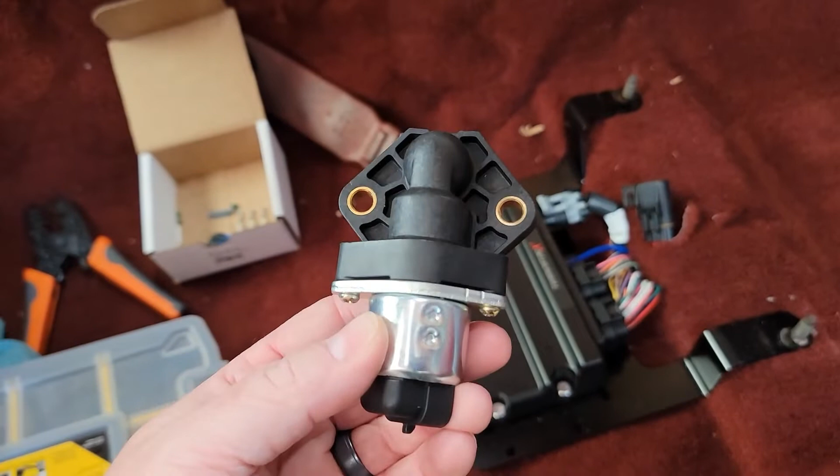Okay, so first thing is you can get this Ford bolt pattern, and the hole pattern is for a Ford IAC, but it's got the GM stepper motor on it. See that? This is like 25 bucks on Amazon. You can Google it and find the part number.

Next thing is Holley sells this. It's the 570-211 4-cavity female black connector. So you can see in the box, it comes with the connector that plugs into the idle air control, the terminals, the little seals for the wire, and a little clip that holds it in.

Okay. Now you'll need a set of crimp tools like this one or something similar. So as you can see, it's got the 24 to 22 gauge wire crimp, 20 to 18, and 16 to 14. And then it's got the seal crimps. So there's two different size seals. The seals are these, the little green things that I showed you. So that basically makes that a weather tight connector. So that's that parts wise.

You'll need wire. So at the company I used to work for, I sourced a cable right here. This is just a regular 4-conductor 20 gauge cable. This stuff is extremely cheap. So if you don't have a 4-conductor cable, Holley sells a 4-pin. It's basically 4 wires with the pins that plug into that JB1A or JB1 or J1B, whatever it is, connector that you'll have to plug into. Which leads me to my other thing you'll need.

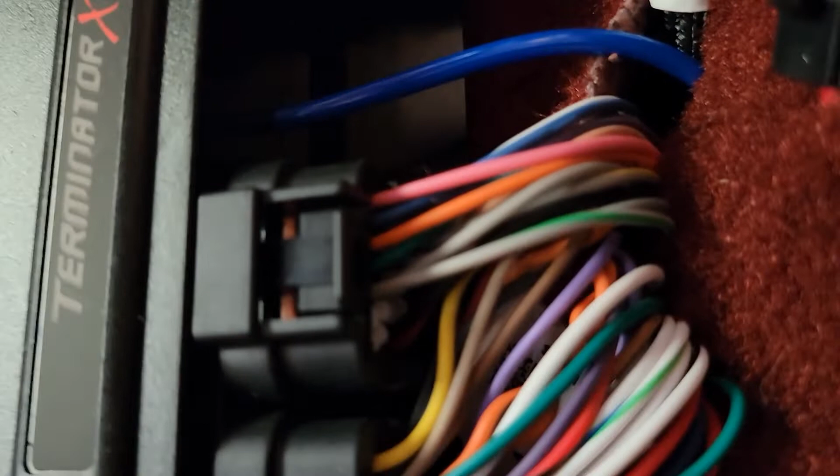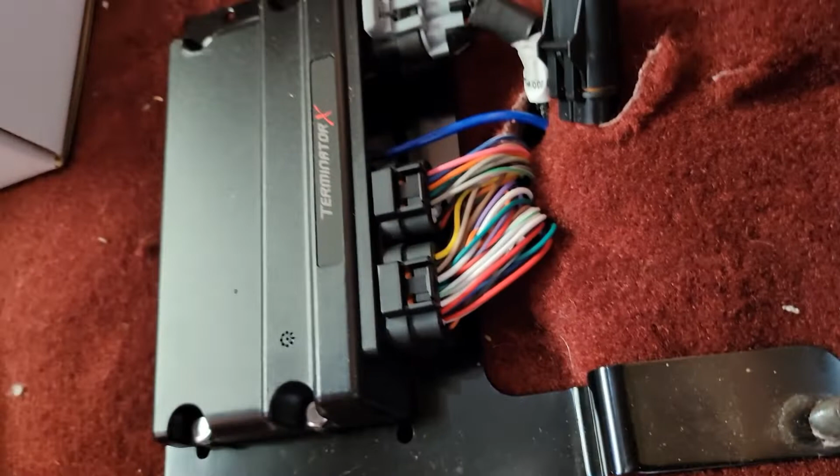Here we go. So you'll need these. These are the AMP Super Seal 1mm terminals or pins. So these will snap into the connector right here. So you can see those white plugs. So I'll basically unplug this connector, pop those little plugs out, and then once I get the wires crimped on the cable, I'll push those wires in, and I'll feed everything up through the firewall where the harness is, with the rest of the harness.

I have some black wire sleeve like Holley uses, so it'll all match. When I get done, it'll look like it's from Holley, like it's the factory wiring harness. So anyhow, I'm going to stop this video right here, and then I'm going to get to work, and I'll get back to you guys here in a minute.

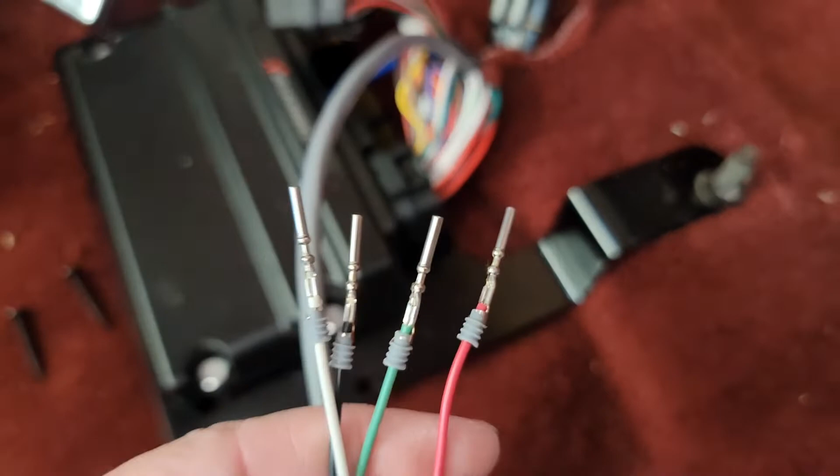All right. So I got the cable ran, I got the pins crimped on. Alright, so I really hope this is worth it. We'll flip you around and show you.

These AMP style connectors are not the easiest things to work with. And when you're just adding 4 pins, I've probably done this the hard way. I pulled the connector completely apart. And I probably should have just popped that little clip up and popped them in and been done. But I didn't. So here we are. Let me, geez.

I made a mess. I mean, I could fix it, but learn from my mistakes. Flip it around and show you. Now, see all these pins right here, right? Now, luckily everything is still held in place. It's in the right number location, but they got to go through those holes.

So at first I tried to run the little piece right here that holds everything together all the way up on the pins and then just slide it back on, and well, that's not working. So I'm gonna have to put each wire in individually and then slide it back together. So that being said, future reference, if anybody does this, do not take the connector apart. You simply pop that little white clip up, pop the pins in and push it down, and you're done.

So I've literally wasted about 30 minutes doing it this way. So please, please, please learn from my mistake. Do it the right way the first time and don't go through the crap I'm going through right now. All right. I'll get back to you guys in a bit.

All right. So I got it, and that sucked. I ain't gonna lie to you. That was terrible. If I had this on a bench with a whole wiring harness laid out and like a little vise, piece of cake. But with that much room coming out, not a piece of cake. So, like I said, learn from my mistakes.

So what you want to do is, basically when you're adding these wires, you'll pop those little white things that are in there out, okay? Pop those out. Or, I mean, I guess at the worst case, if you have to pop this end off, that's fine. But do not pull everything out.

So you pop this little clip right here up. You push up on the white part right there, just easy. Pop it up. Push your new wires in. Push it down. You're done. If you do it the way I done it, expect to be here for a good 20-30 minutes getting all those pins back in there. So anyhow, I'm going to plug this back up. So there's that.

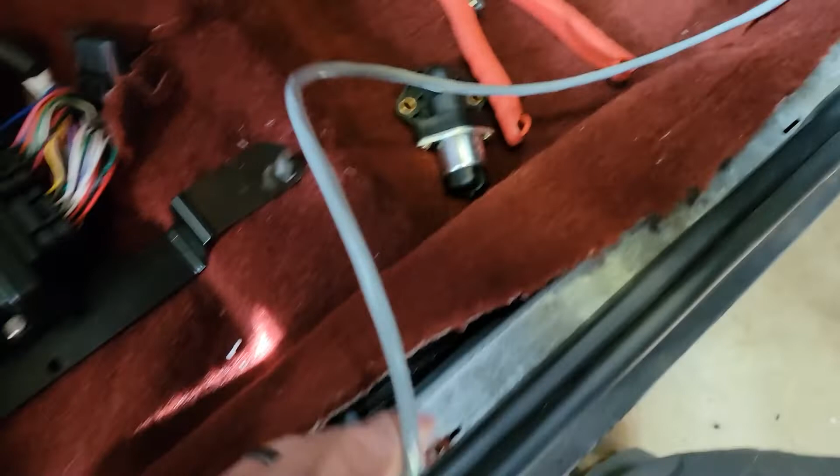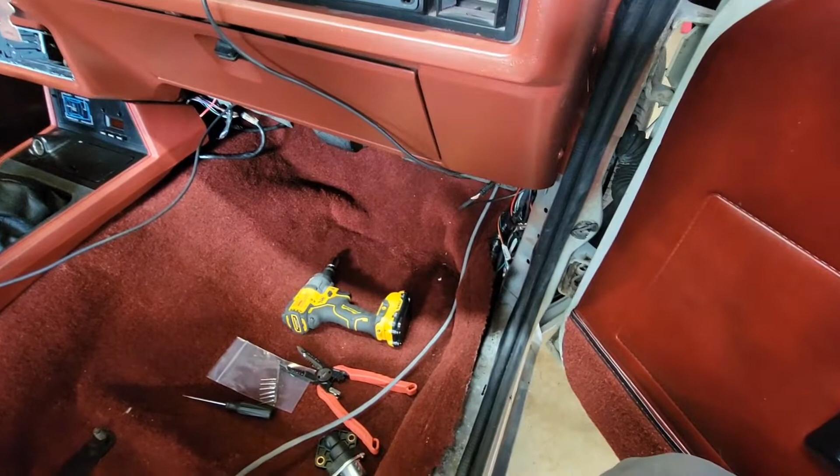So now I want to get all this wire right here cable tied up with everything else, go up there, put my black wire sleeve on it, feed the wire sleeve through the firewall so everything matches, get my length how I want it, mount the IAC, get the cable length where I need it, cut it, peel it back, strip it, put the new terminals on it, plug it in. Then you got to hook the laptop up to it.

I'm going to have to go into the settings and basically take the Ford idle air control out of the outputs, so it frees that output up. Then I'll change it in the idle settings. I can show you all that. I'll change the idle settings, and I'll put in the GM LS IAC style idle air control.

What I'm going to do, I'm going to open up one of the global files, and I'm going to take the park positions and all that from one of those for the GM style idle air control, start with those factory settings, and then I'll tune from there. Just because I don't know anything about the GM idle air controls, how the park positions work.

With the factory Ford stuff, I can look on my actual Tuner Pro software or my binary editor, and I can look at the factory Ford tune for the idle air control and get the park positions and, you know, just all that stuff on there. With the GM stuff, I can't do that because I don't have any daggum GM tuning software other than the Holley. So that's what I'm going to do.

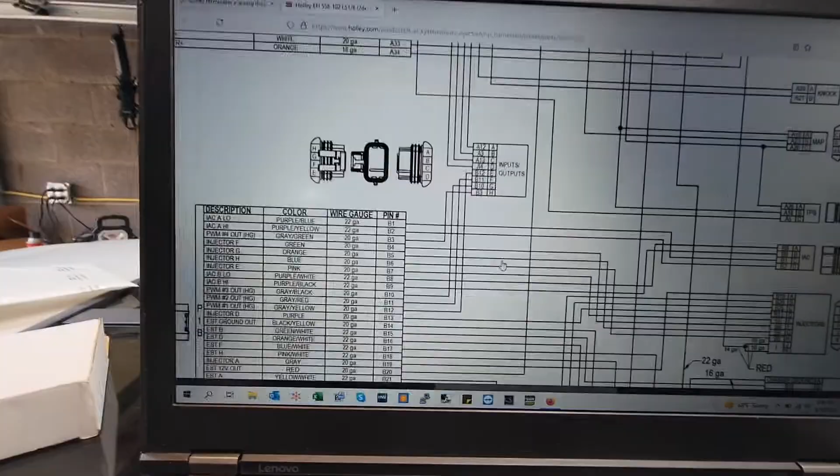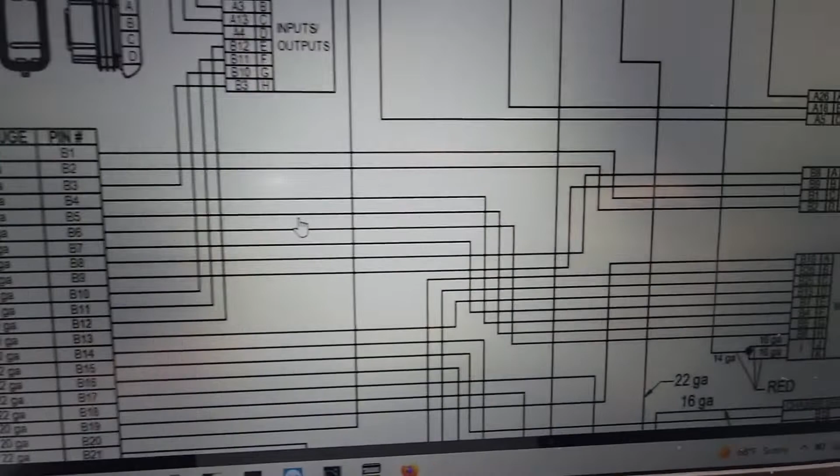Alright guys, so you can see right here, pins 1 and 2 is the IAC low, IAC high, and pins 8 and 9 are B low and B high. Now when you trace those over, they come over to the IAC motor. So you got 8 and 9 is on A and B, 1 and 2 is on C and D.

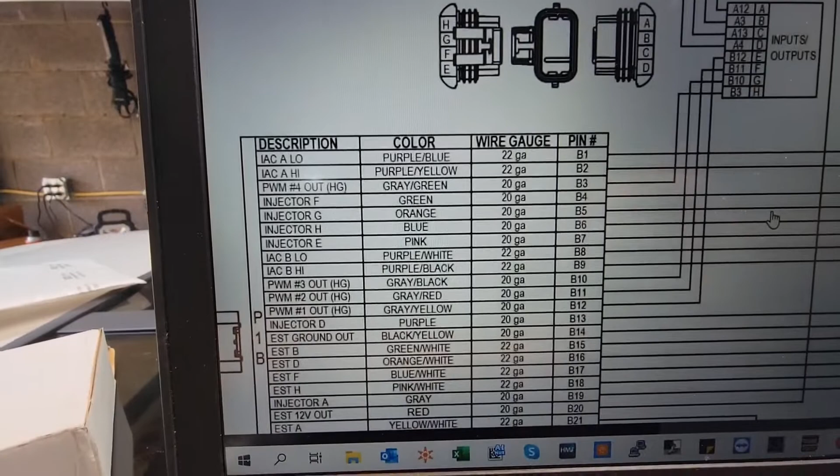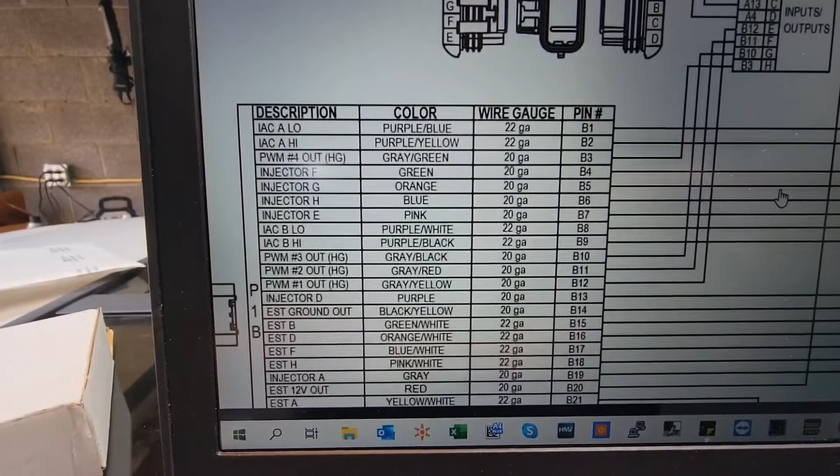Now, the factory colors are purple with a blue stripe, purple with a yellow stripe, gray with a green, or I'm sorry, purple with a white stripe, and purple with a black stripe. I think GM uses those same colors as well for the factory idle air control wiring. So what I done was the cable that I had, it had red, black, white, green, and brown. Of course, I always cut the brown out.

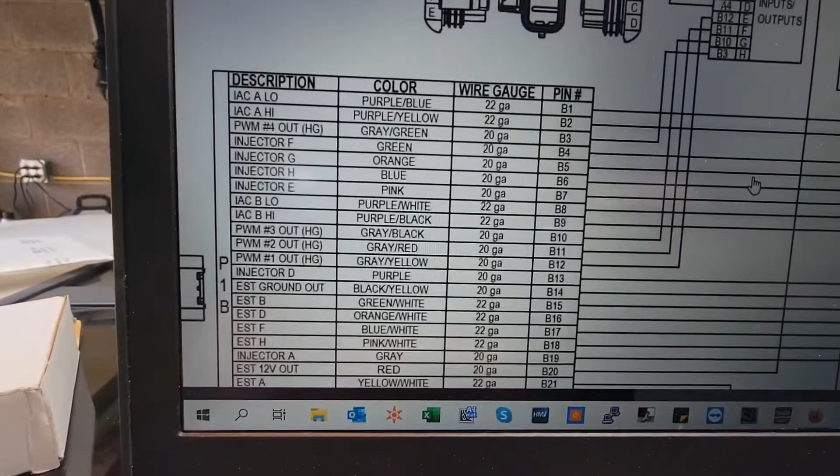And so what I have always done in my line of work is that red and black were always my I plus, I minus. White and green, or we used to use blue and yellow, was always V plus, V minus. If you don't know that, I plus, I minus is current, plus and minus. V plus, V minus is voltage plus and minus. So I just carry that same mindset over to this cable. So I put red and black on 1 and 2, white and green on 8 and 9. It makes it simple for me.

Just remember, when you do this, you do not have to have those exact wire colors. As long as you know which wire is on pin 1 and 2 and which one's on 8 and 9, you basically transfer that from the ECU to the idle air control, and that's all you need. Now, would it be cool to have those? Sure. I almost paid $33 and bought the Holley harness that they make. It's not really a harness, it's just 4 individual wires with the pins already on them. But it's like 33 bucks for 4 wires that are, I think, 10 feet long maybe. That's a lot of money for 4 wires with 4 pins on them.

When, I mean, you could literally buy those pins for like 50, 60 cents a piece. Now you got to pay shipping. So you could buy 10 pins for, I think shipping and all was about $11. It's pretty cheap compared to 33. And then you can go down to your local AutoZone or wherever, Amazon. You can buy the wire on Amazon for probably less than 10 bucks.

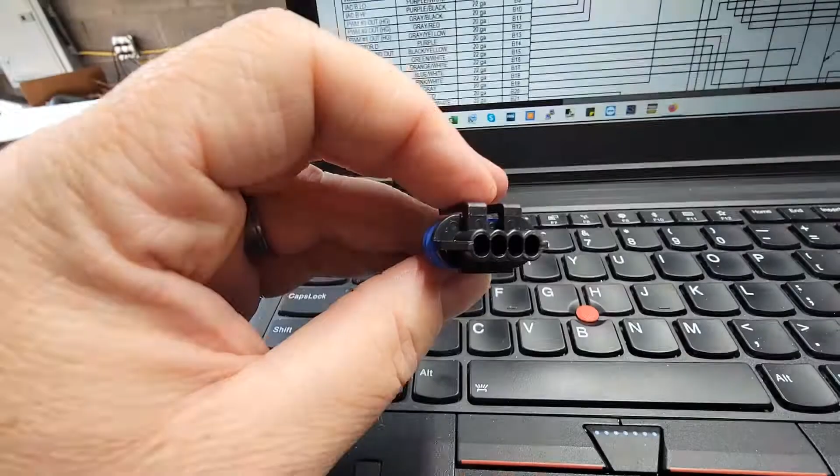looking on the connector, trying to find if it shows where pins A and B are, and it does. So if you look, there's an A, there's a D, there's a B, and a C. So you transfer that to here, there's A, B, C, D. So 8 and 9, which is my white and green, is going to go in A and B, and red and black is going to go in my C and D.

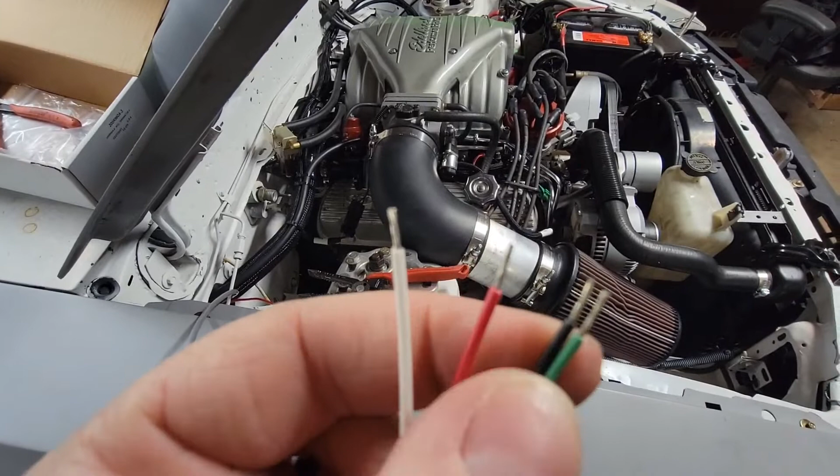Simple enough. All right, so I'm going to get out here, get my wire prepped, get the sleeve on it, the shrink tubing on. I've already got the wire cut and stripped, and you typically only have to strip back about 3/16 of an inch. You can go with like 1/8 of an inch with these pins, because the part that's actually being crimped is maybe 1/8 inch at the most.

So I'm going to take my wire sleeve, slide over this, slide a piece of shrink tubing over it, slide the seals over it, then crimp my pins on, heat the shrink tubing down, and put everything together and plug it in and get stuff changed inside the software. So when I get all that done, I'll get back.

Alright guys, here's something else. I bought this kit right here from Harbor Freight. It's a shrink tubing kit. I've already used a lot of it, and this is some pretty good stuff. So anyhow, that's what I'm doing here.

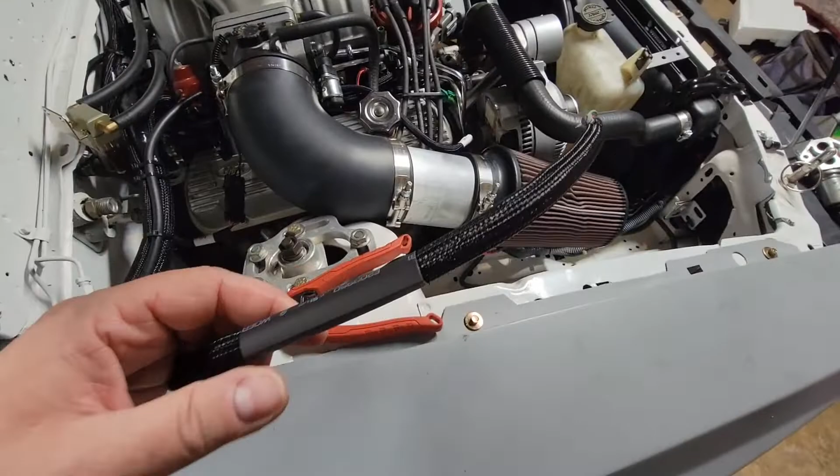So got my sleeve over, got my shrink tubing over. Now it's not that short, I have it scrunched up. It'll actually go all the way out to here when I'm said and done. So I'm going to get everything up here, get this connector on it, and get it plugged in. And I'll walk you through the software, how to change all that stuff, and then go from there. See you in a minute.

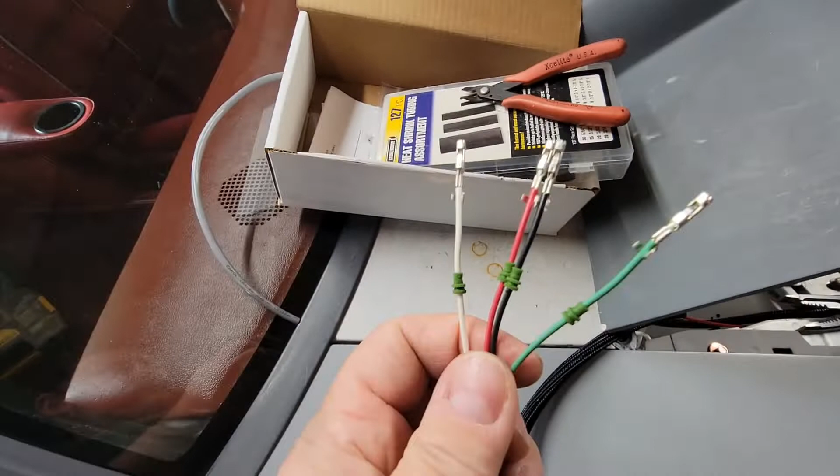Alright guys, so here's the pins crimped on before I put the seals on. So I'll show you how this goes. So you can see that's a nice crimp right there, and that's because of those.

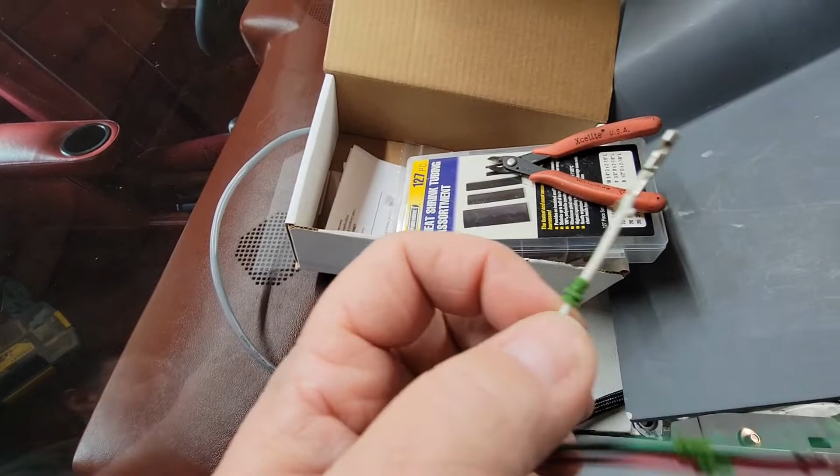So now what I'll do is, if I can do this one hand, I don't have a tripod out here. Well, I got a small tripod. Anyhow, it's just rambling.

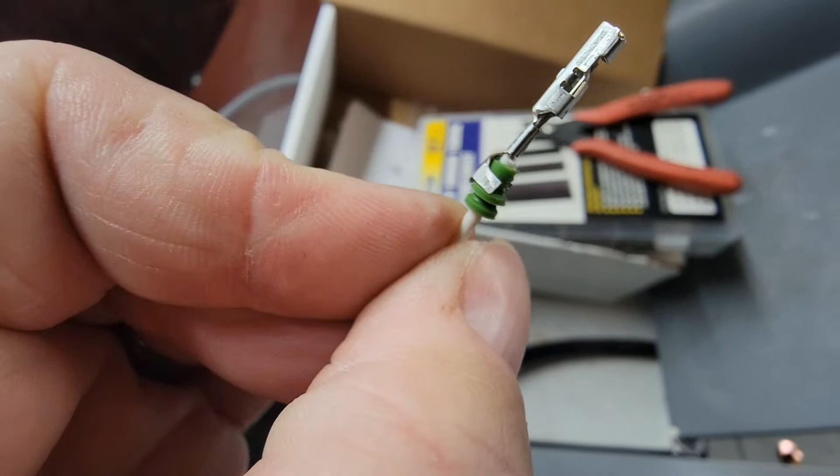So see that? So I can get a good shot of that. So basically, you'll run that wire seal up to there, and then you'll use the round part just to smash those little legs around. It'll just crimp them in a circle, and it's just enough force to keep that from sliding out whenever you push everything together, and it just holds it in place.

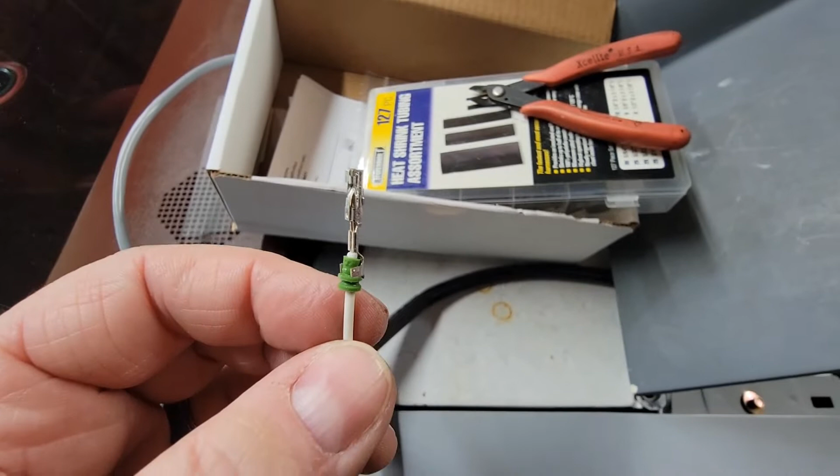And of course that fits snug around the wire, and that keeps moisture and water from getting in there. Probably most everybody that does this knows, but for those that don't, that's why it's called a seal. So anyhow, I'm gonna get these seals crimped on, and then get this connector put together. Alright, so you can see that's the end result.

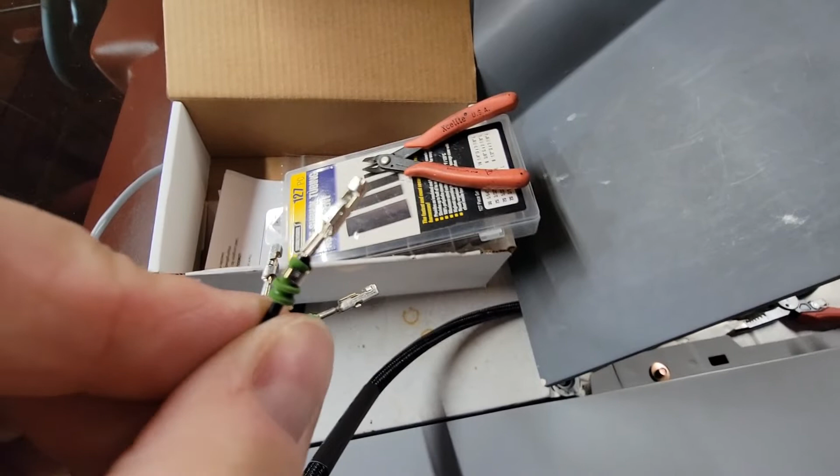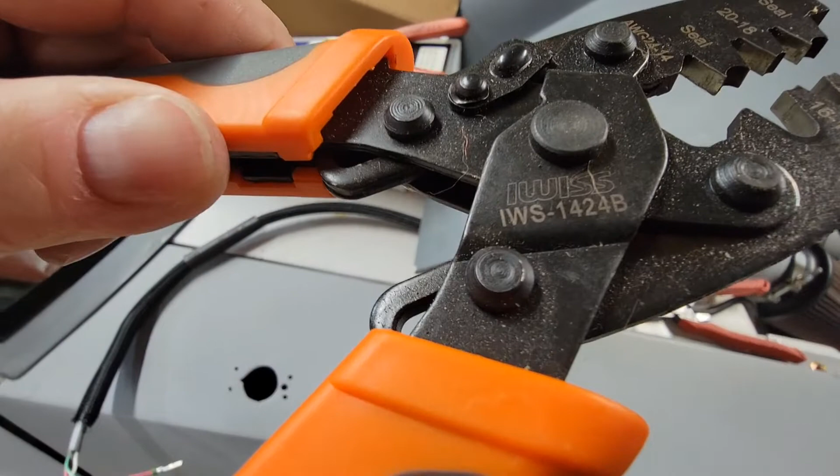Man, my camera really not wanting to focus on these little wires. See that? That's all it is. It just holds it on. I'll give you a shot of these pliers so you can look them up on Amazon. They were like 15 bucks or something. The IWS-1424B. They make better ones than these out there. Just Google or go on Amazon and look up WeatherPack wire crimpers.

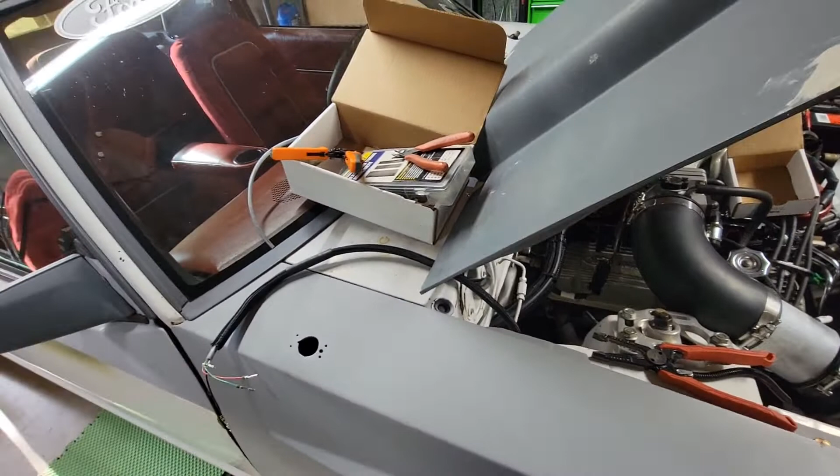So all these connectors are GM style Delphi connectors and AMP connectors that Holley uses, but it's the same type of connector as the WeatherPack stuff. I have a little WeatherPack kit that I bought off Amazon that's really good if you're just hooking up like an MSD box or something that doesn't draw. You can get them where they can handle some pretty decent current, but the kit that I bought, I think, is like maybe 10 to 12 amp. I'd have to look.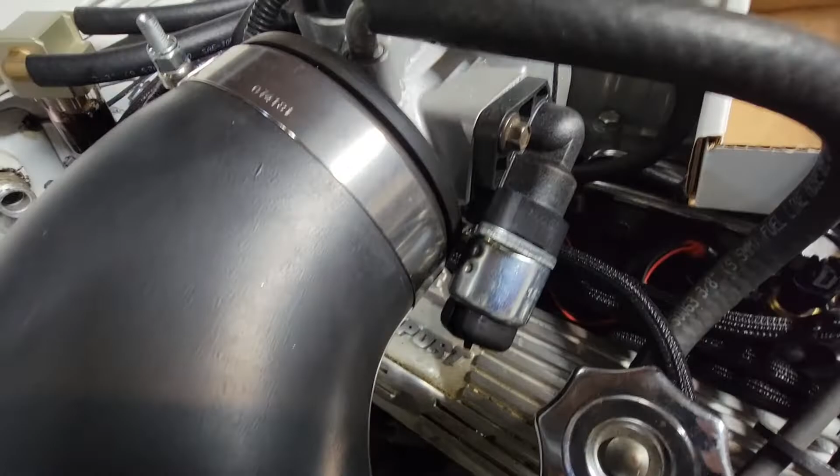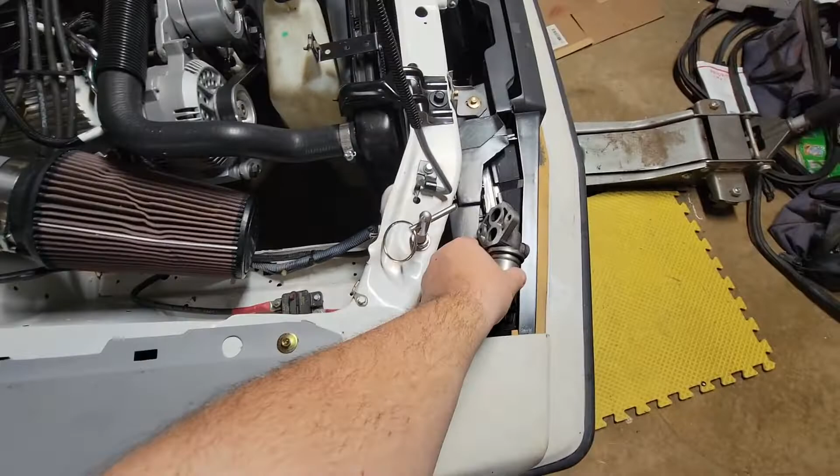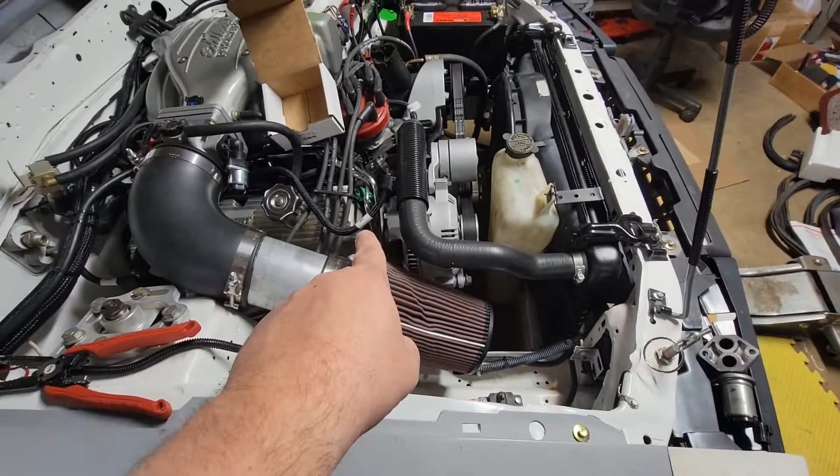But anyhow, there's the new IAC mounted. Here's the old one. So this is a Ford Explorer. You see the connector's different. So I had to take the connector off of this, and put the Ford Explorer style connector on it. This is the old setup that takes up an output.

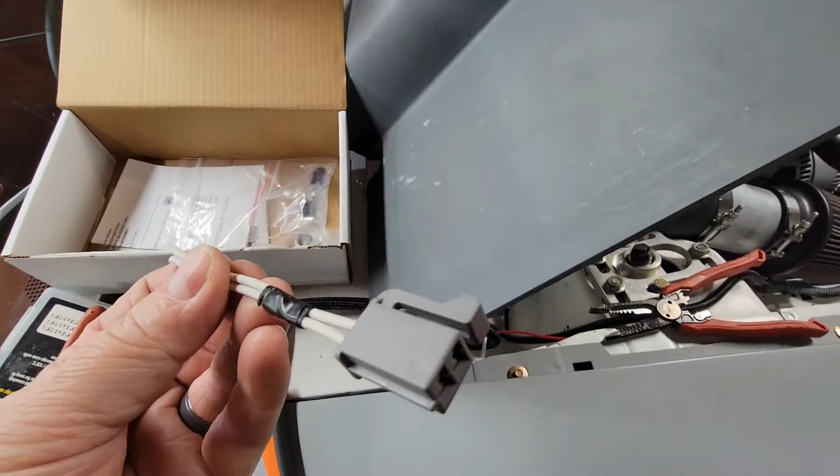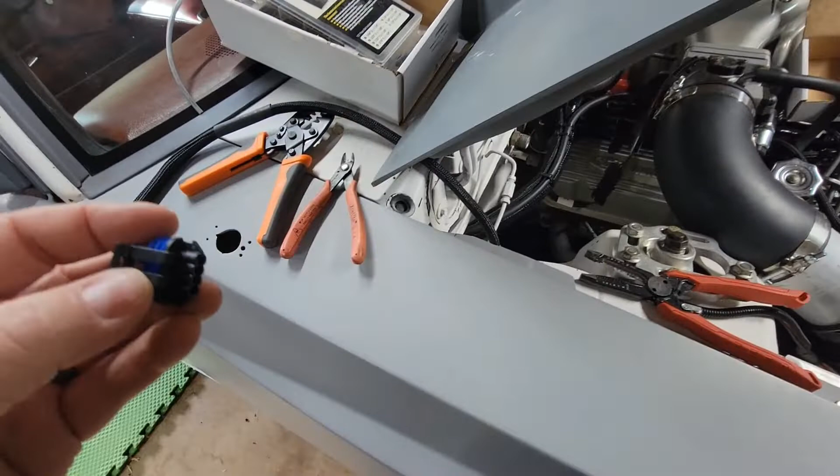But if you look over here, I kept this. So if this GM stuff don't work out, then I can try to find a Ford Mustang idle air control, I think the F-150s too will work, and see if that's any better. So I kept this in case I ever needed it. So anyhow, I'm gonna get this connector put together, get all my sleeving ran up and my shrink tubing shrunk up, and get everything plugged in. I'll get back with you guys in a minute.

All right, guys, so there's the final product. These things go together pretty easy, pretty self-explanatory whenever you put them together.

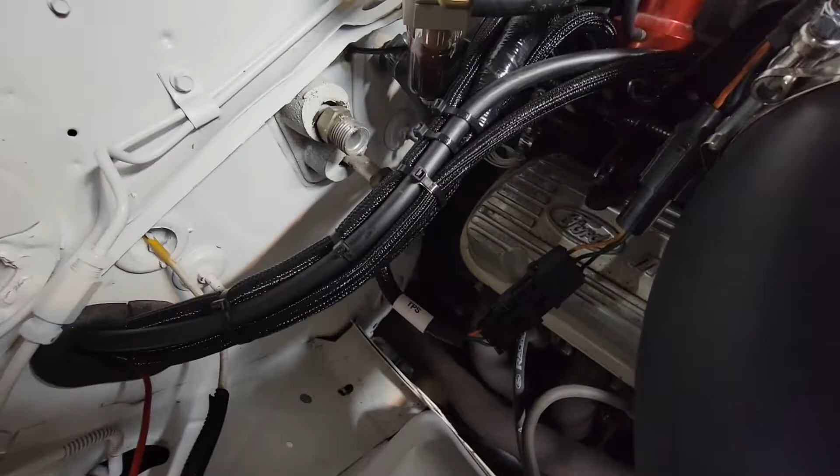So anyhow, finished product there. I'm going to route this with that, a couple cable ties on it to hold it, plug it in, then I open up the software. Alright, cable tied up. It looks exactly the same as it did before I started, except I put a little cable tie right here to keep that from getting tangled up in my throttle down there and hanging it up or something.

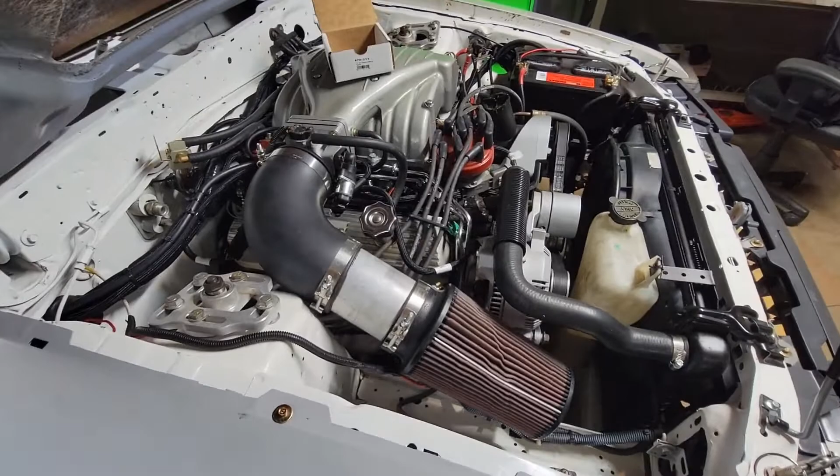So everything should be good. If this works out, then I'll be taking this wire and probably just folding it up underneath there in case I ever need it for anything. But all right, let's open up the software. Let's see here, I'll just minimize that. Well, actually, before I do this, okay, I'll show you. We'll open global.

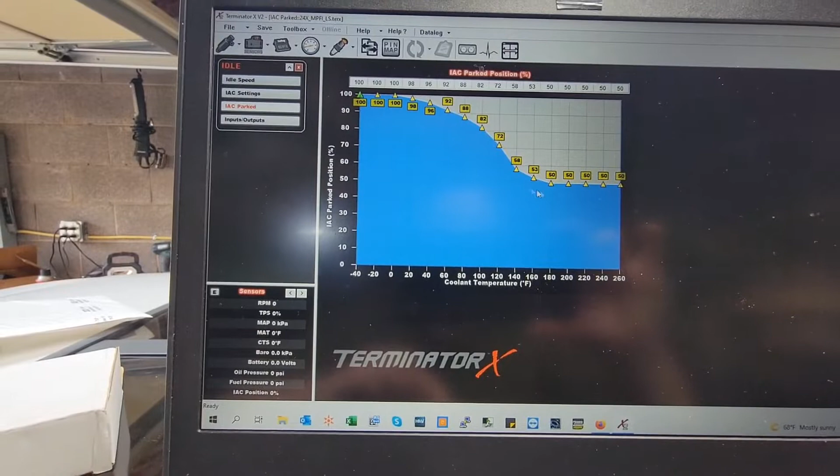Yeah. Go to GM LS based. I don't know what these 58 and 24 are. Oh, that's some LS crap. I have no idea what that is. Maybe it's the teeth on the, I don't know. Well, let's just do that one. Idle settings, parked. Now, so this is really similar to what the Ford is.

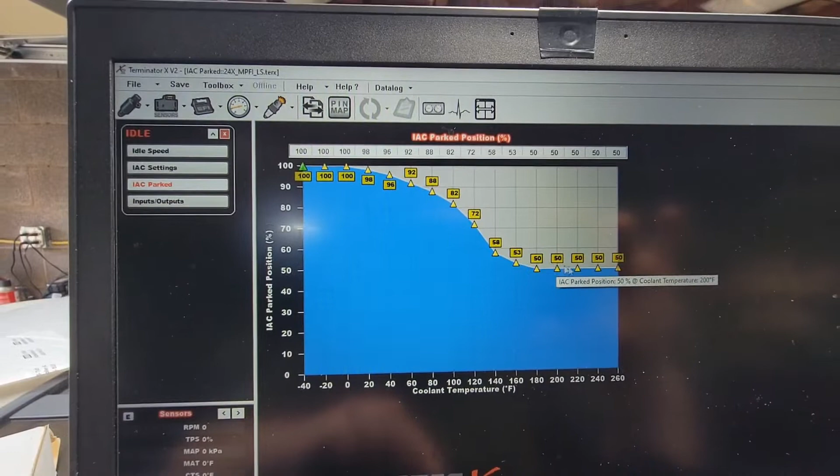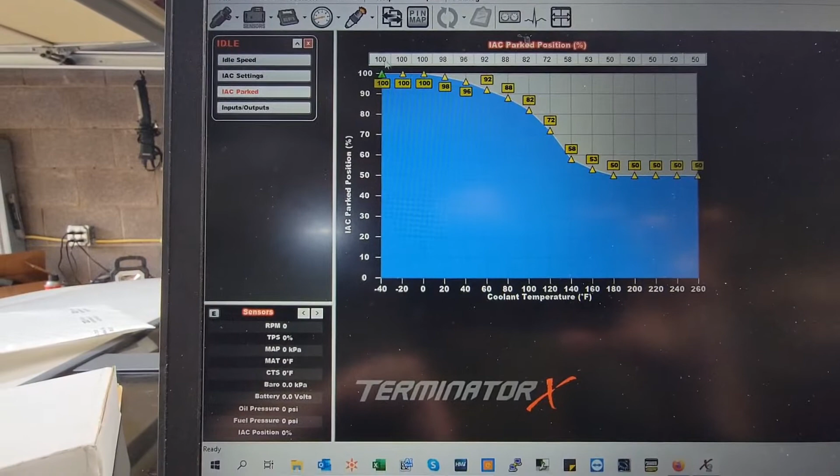It's not much different. So I may leave what I have and just adjust the bottom numbers right here. Basically, you never really want to run your idle air control at 100% because you will shorten the life of it. So I normally change these numbers to about 95 or 98. Looks like I got 100, so you could change that to 98 right there, and then it would never completely max out, which I don't think you'll ever need it to fully max out.

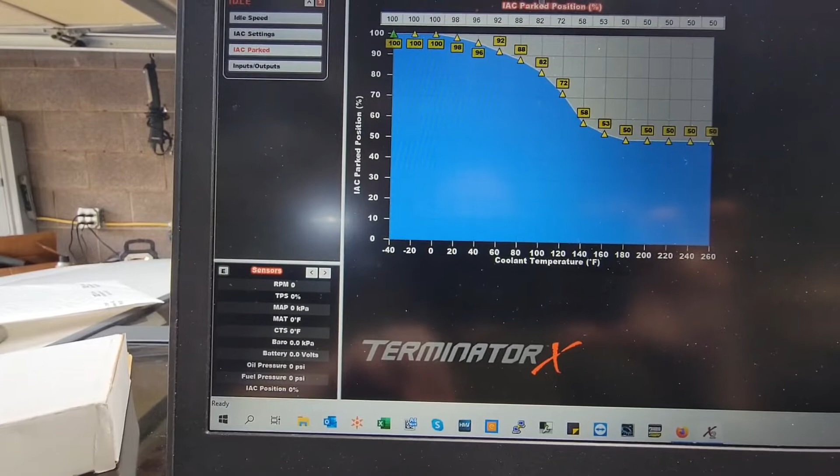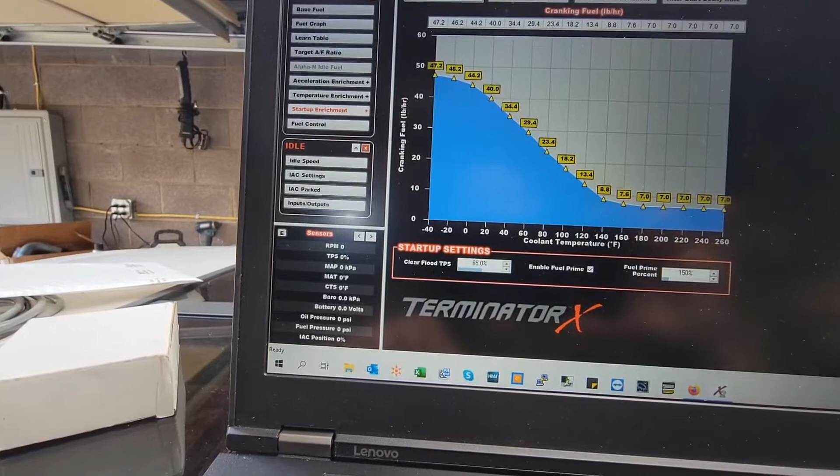So if you go over here to fuel, startup enrichment. Now, I want to do that. Hold on a second. Where was I just at? There we go. Idle speed, I'm sorry. So even if you're at 20 degrees, 0 degrees outside, the target speed on the LS is 1100, and then it goes down to 700.

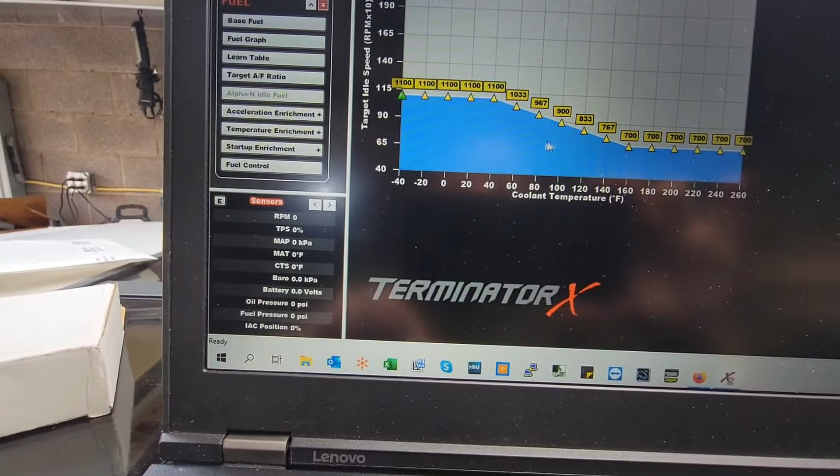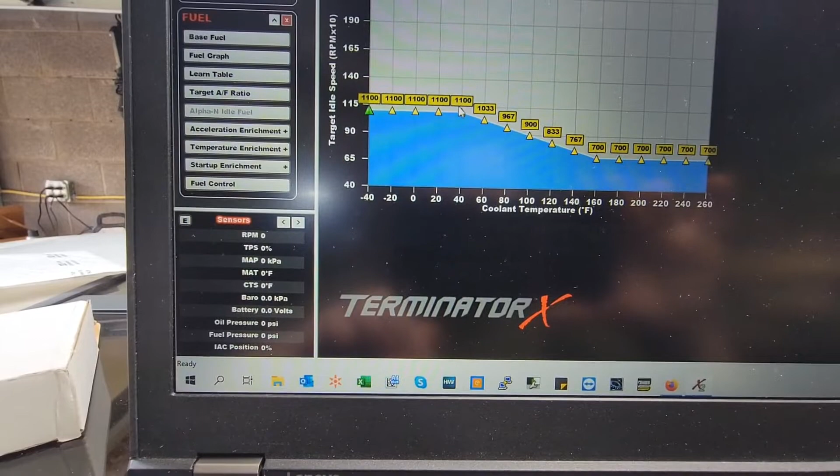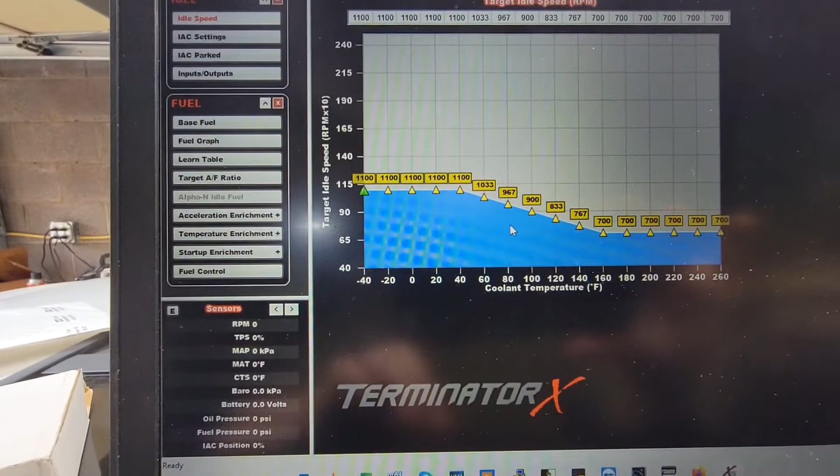On my car, I have it just straight across at 680 all the way across, even though it don't idle that low, but still. So even if you did follow this right here, it's not going to take 100% of the idle air control to get to that 1100 RPM. So, like I said, the idle air control will never fully max out, I don't think. If somebody out there knows more than me about this, then by all means, school me. I could use it.

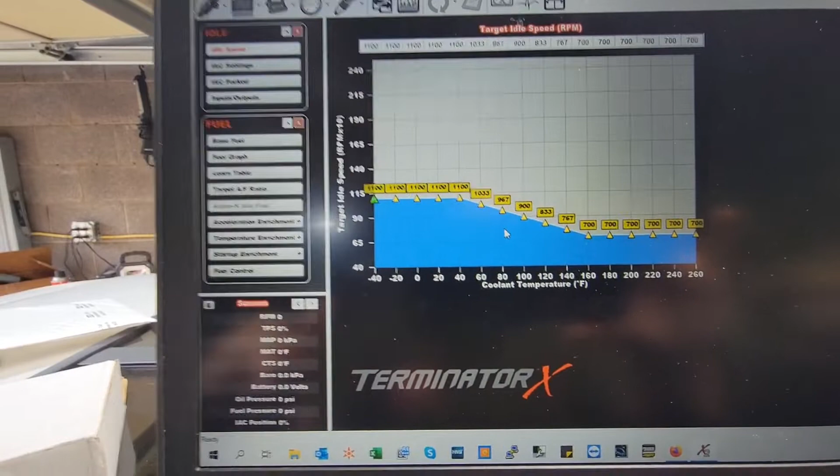So, all right, I'm going to clean up a little bit, get the laptop hooked up to the car, get the key on, upload the tune that I have in the ECU now, make those changes, download the tune, and then start it.

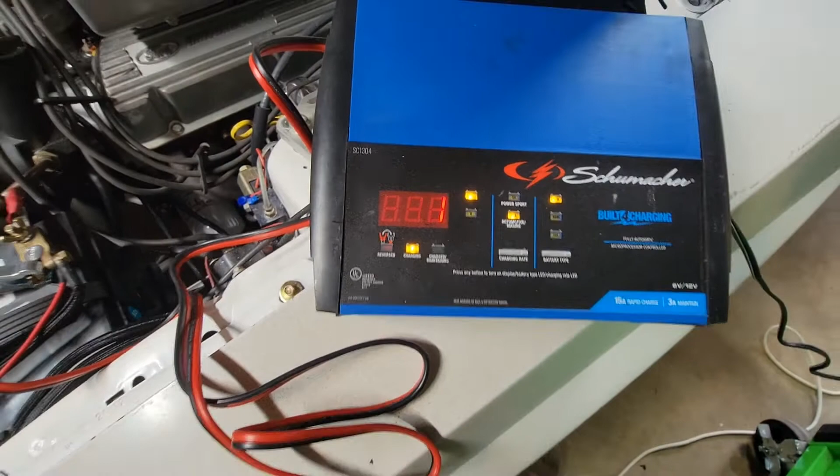Well, as you can see, my battery is at literally 1%. Man, I don't know what happened. So I'm gonna have to pick this video back up tomorrow. I literally drove this car maybe a week ago to get the front end aligned on it, and then come back and battery's completely dead. It hadn't done this yet. I don't know what's caused this. This is new. So something has had a draw on it.

Headlight switch is off. I thought maybe I left the headlights on in the garage. I don't know. Frustration. So anyhow, I guess tomorrow I'll pick back up and hopefully have a full battery and be able to test this thing out. Anyhow, I'll pick back up tomorrow.